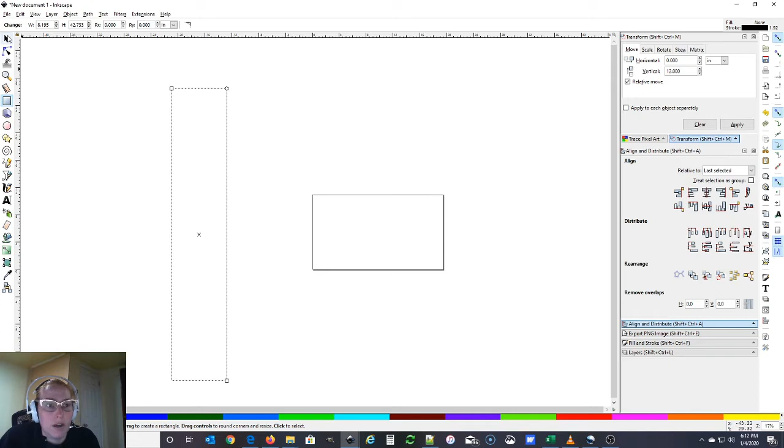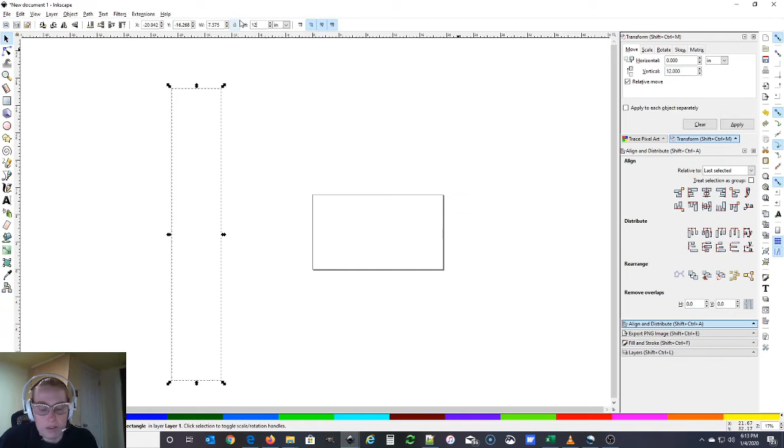So here is our board. We want it to be, let's see, what did I say my size was here? 7 3/8 inches wide, so 7 plus 3 divided by 8 inches. And our height is going to be 6.5, so 12 times 6.5 is 78. So there's our size for our board.

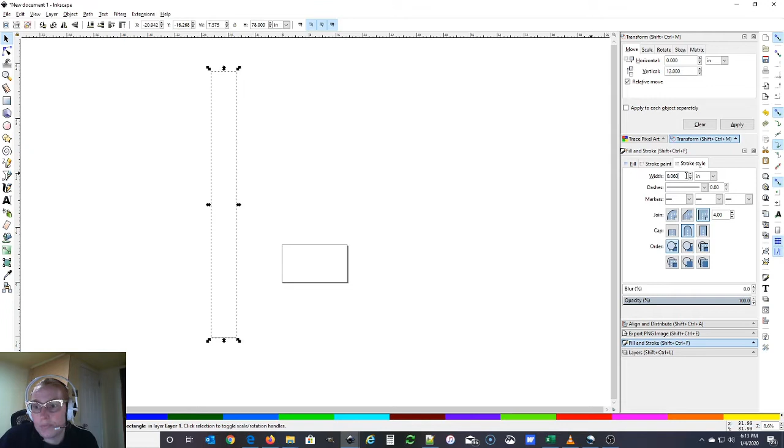Just because visually I want to be able to see it more, I want to increase my stroke size just to make this a little bit darker so I can see the outline. That's probably not here, let's try 0.1. There we go, so it's just a little bit darker.

So we're going to actually use a new tool called Transform. I have it opened up here. You can get to it, let's see, here, Object, and then Transform, and it will open it up over here on the right hand side for you.

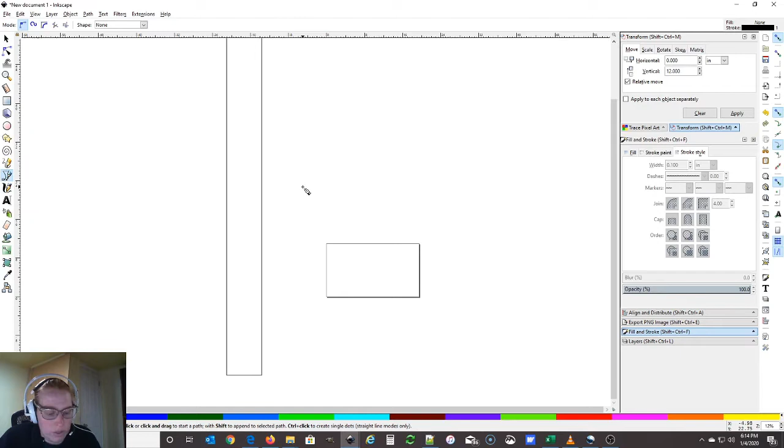And we're going to create our line using our Bezier tool. So here's our Bezier tool, and we're just going to hold Control down while you click and drag. Control makes it so that it's a straight line along the path for what you're doing. So we're just going to make our line, and then before we move our mouse again, you double click to end your Bezier tool. So here is our straight line.

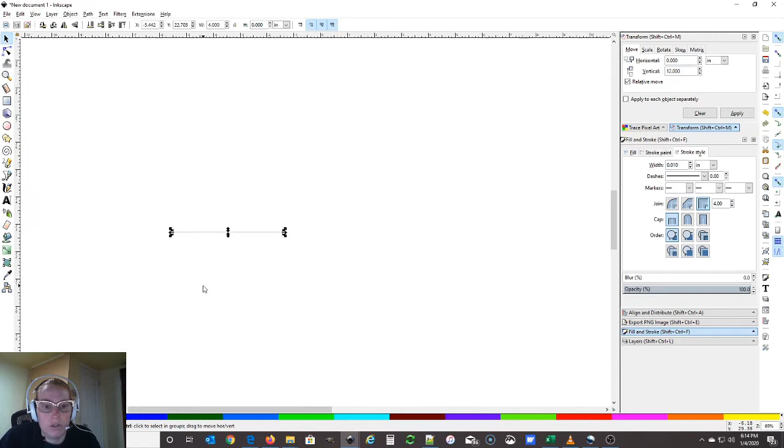And I'm going to say I actually want it to be 4 inches wide. So I did a little bit too much drawing, but that's okay. And, oops, I don't want it that much. I want it to just be a little bit thicker stroke so I can see it better. So we'll move it over here onto our board.

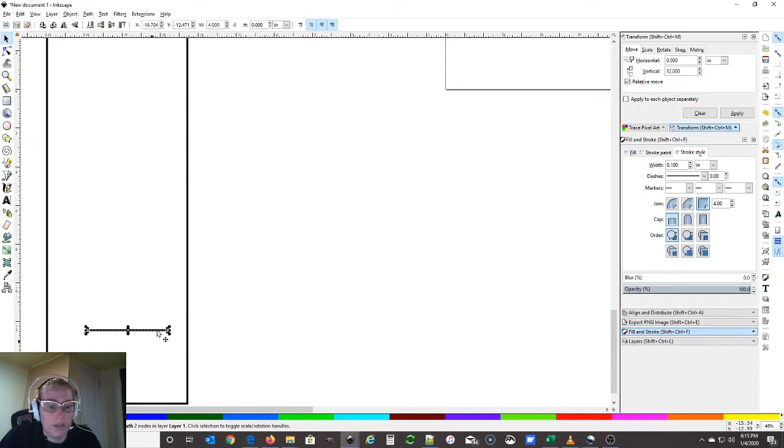So if we think about growth charts, the typical growth charts, like the one that I have on my wall too, the board doesn't start at the bottom of the floor. You need to give a little bit of space between where your floor is and where the board actually starts, because you don't know where your client is going to be installing it. They might have a molding going across, or there might be something going on on their floor. So you want to give a little bit of space. So you won't always start it at 0, you're gonna start it a little bit higher.

So this board is going to start at 6 inches as our height. And then when you go to install the board, you tell your client their instructions for installing, and they want to take into account where their floor is, where the child is going to be standing, and if there's carpet or anything with give, and then use a ruler or measuring tape to line up that 6 inches to be 6 inches off the floor. So then they mark the wall, and that's how they're going to attach the board to the wall so that it's accurate, so that when the person getting measured backs up to it, lines up to it, it's accurate going up the rest of the way.

So for our tool here, we have this line, and we'll position it here within our box later, but the first thing that we want to do is we want to create 12 marks, because we're going to split our board, each foot, into 12 inches. And so the transform tool will help with that quite easily.

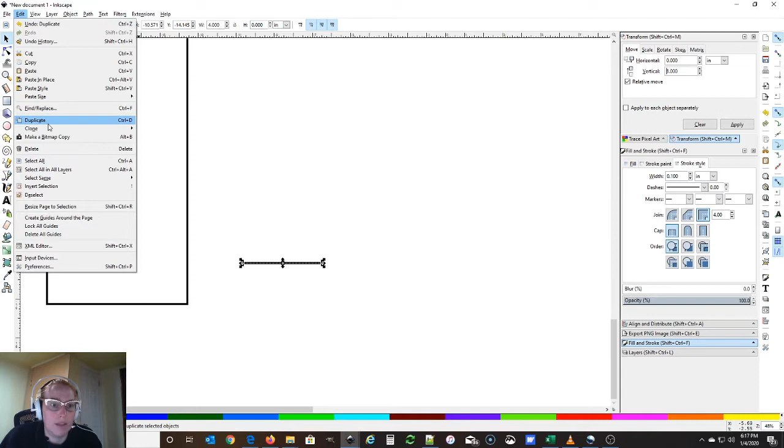So we have our tool. We're actually going to go every inch. We want 12 of them. So if you have it highlighted and you have it programmed over here, vertical 1 inch, then you can do Control D, or you can come over here and duplicate it. I like using Control D. Actually, it's under Edit, Duplicate, but Control D is what I'm used to because of keyboard strokes. And then when you duplicate, there's 2 of them there.

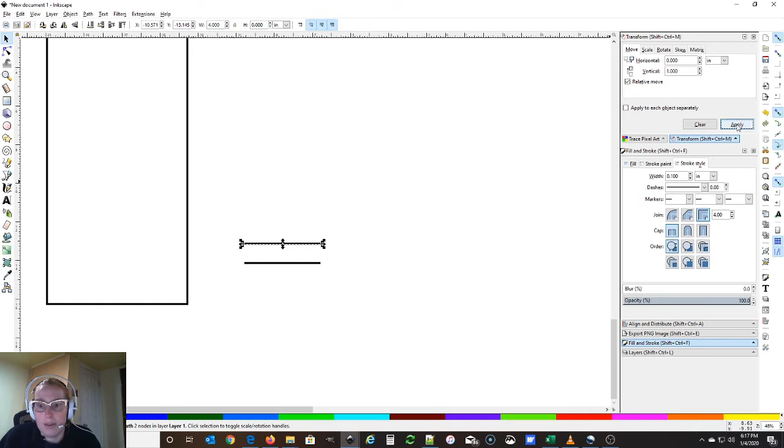So you could manually try to place it and line it up, but Inkscape has a tool to align this for you. So I deleted mine, so I'm going to Control D to duplicate, and then I have it set to 1 inch as a relative move, and then I apply. And it automatically moved it up 1 inch. Control D to duplicate, apply. Control D to duplicate, and so we're just making a duplicate and moving it up 1 inch at a time. So we're going to do 12 of these. 1, 2, 3, 4, 5, 6, 7, 8, 9, 10, 11, 12. So now we have 12 of these.

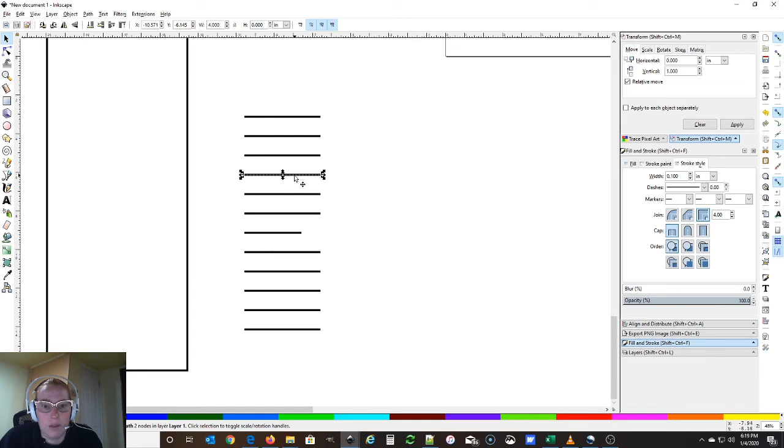And then we need to resize our lines to follow what a traditional ruler would be. So if we count up to 6, that'll be our middle mark for 6 inches. 1, 2, 3, 4, 5, 6. So let's see. Okay, yep, we're good there. So that's our middle mark, and I want my halfway point to be just a little bit shorter. And then we need to figure out what our next measurements are going to be. And so typically our next one is going to be at the quarters. So this one and this one, if I'm looking at it correctly.

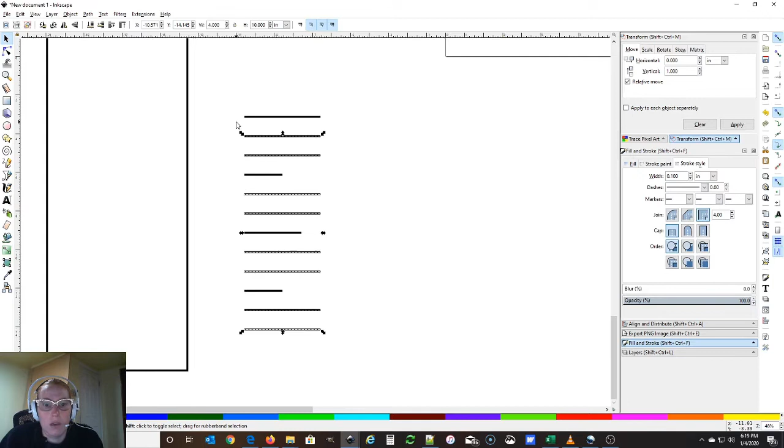So if I click on that one, and then I click on 1, 2, 3, that one, both of them are selected, and then I can say I want that one to be 2 inches wide, and it automatically resizes both of them. And then I want to grab our sets of 2, and I want that one to be 1 inch wide. So here we have our measurements for our ruler.

To start off with, we're going to put a text on here and say this is 1. And we'll play with font and placement of numbers and all of that later. So here we have 1, 2, 3, 4, 5, 6 inches, 7, 8, 9, 10, 11, and 12 inches, or 1 foot. And we don't have anything down here to represent the 0 because that's going to be taken into account over here. You could choose to also, if I duplicate this and bring it down, put on here 6 inches if I wanted to, or 1/2, or however you want to do it. For this design, I'm just going to go with the 1. So now we have our initial 1 foot mark.

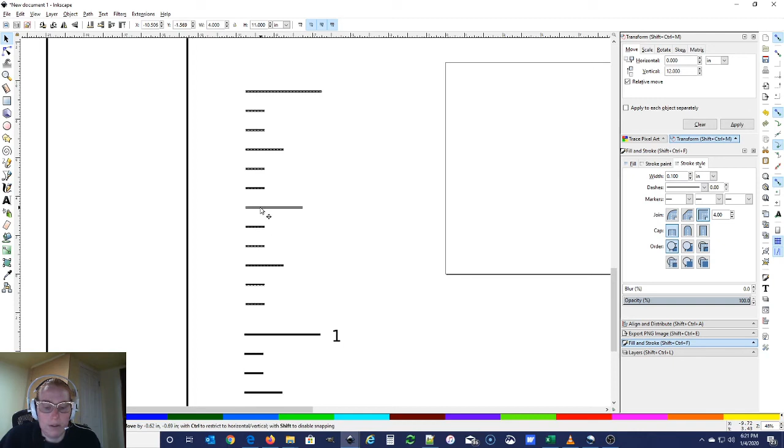So we're going to copy this, and we're going to duplicate this. So here is all of our settings. We have it all specified to what we want it to be. So we'll go over here and we're going to change our transform tool to 12 inches. So we're going to duplicate by foot. So you can do this manually again. You can copy all, you can duplicate, and then you can grab it and try to position it and try to figure out where it's going to be. But you could have the program do it for you.

So if you grab it, again, we're going to duplicate, and then we're going to have it move it relative 12 inches, apply. So now it did the mathematical relationship and just moved it to the right place. And this is 2.

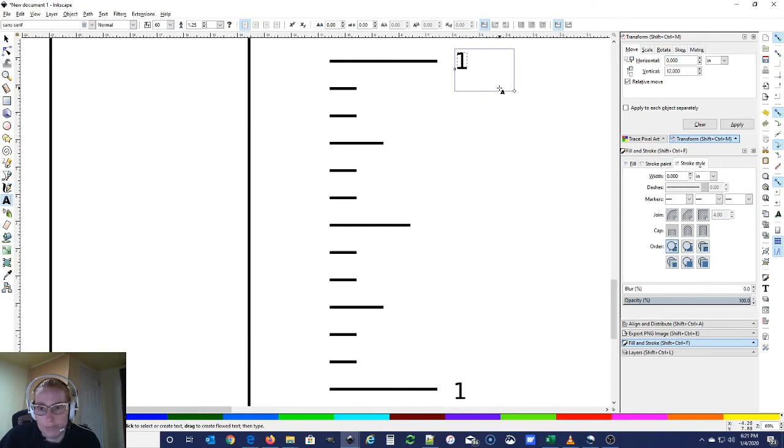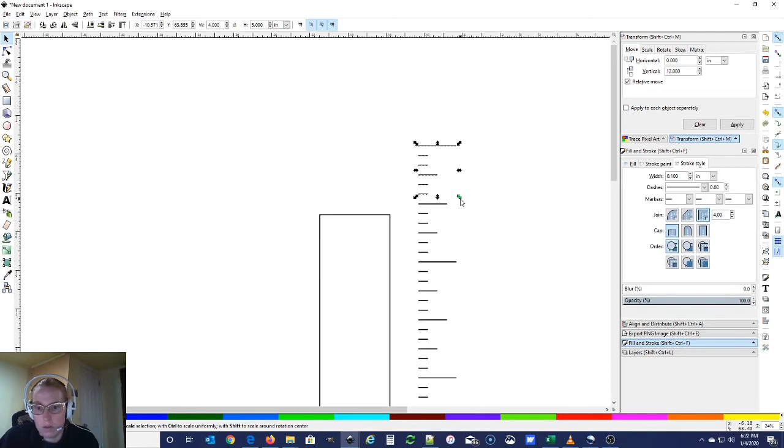So then we just kind of keep doing that. So we're going to do that again. Actually, I'll just grab this one. We're going to duplicate, apply, duplicate, apply, Control D for duplicate, apply, and where are we at here? 2, 3, 4, 5, duplicate, apply, and we're going to take it up to 7 feet here. But I'm going to chop off the top because I only need to take it up to 6.5.

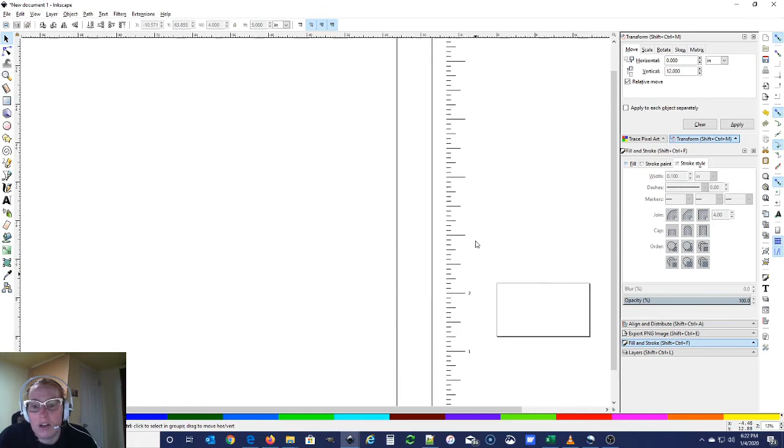So here is our ruler. One thing that I was asking the client for, and I don't know if you heard, the text just came in. I had asked her if she wants it to be centered. It's a friend of mine. So if we center this and then position it on, I'm going to turn off snapping. Sometimes they're helpful and sometimes they drive me nuts. I'm going to position it on the board, and this isn't actually exactly where it's going to go, but in fact I could have just done it with the whole thing and centered it.

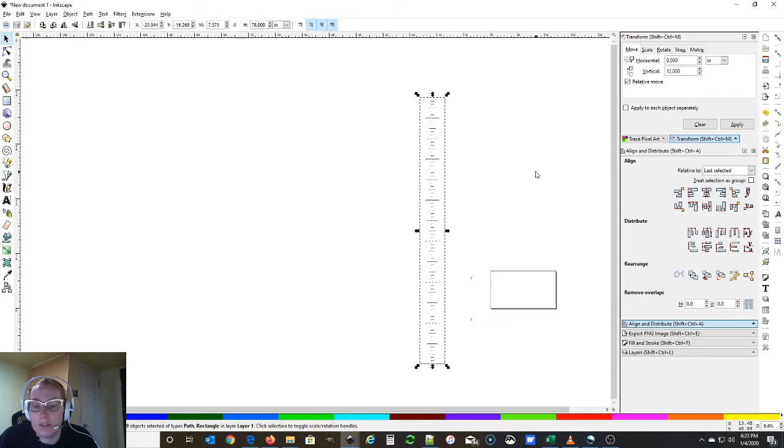So I like the idea, and I wish the one that we have were made that way, and maybe eventually I'll redo it. I didn't make it, I had ordered it way before I knew how to do all of this. That the measurements are all going down the middle, because then when your child is lining up, they're going to back up to the board, and then I use the ruler to hold on their head, and then we mark it across the board.

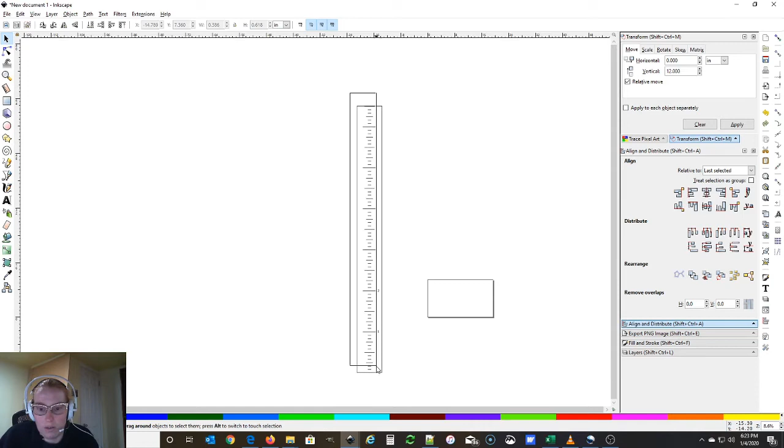And if it's on the left, which is what traditional measurement growth charts do, it looks like a ruler, right? If we line it to the left, it looks like a ruler, but then you have your mark here in the middle, and then we have to draw a line over to figure out where it is they're measuring. So to me, it's a little bit of a pain in the rear, and it makes the board a little bit more messy.

But people are used to having it look like this, and so she just replied and said she's at her son's hockey game, and she polled the crowd, and everybody's saying, do it to the left. So that's what we'll do. But when I upload this file later, I'll post both of them, centered and left, because why not? And you could recenter it yourself too.

So here is our growth chart. We're going to flip it back to being to the left. So the next part is, remember to make sure that you have your gap at the bottom. So we're going to chop off the bottom measurements here, and we actually don't even need that mark. So our very bottom of the board doesn't actually matter where it's going to be. This is just a visual, really.

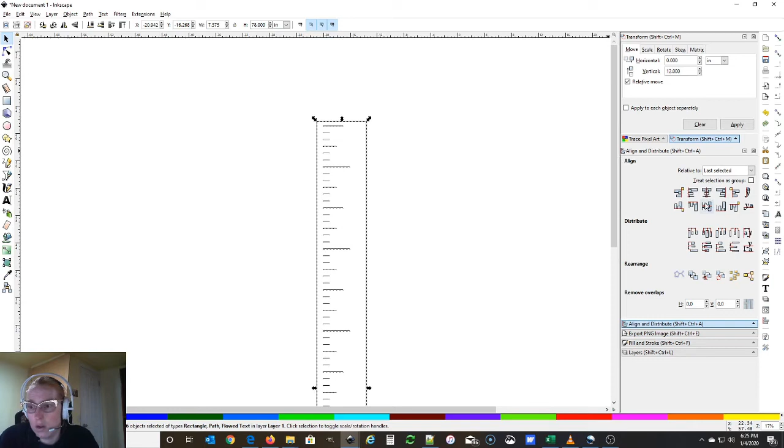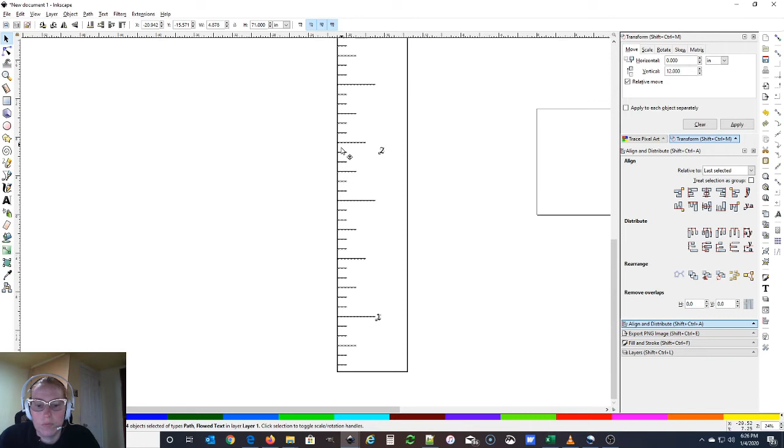We're going to center it over to line up. Oh, except I grabbed my numbers too. So we're going to pull that out. So just barely above. Because I don't know about you all, but you don't usually have a child that's 6 inches tall standing up to the board. Okay, so my numbers are in place.

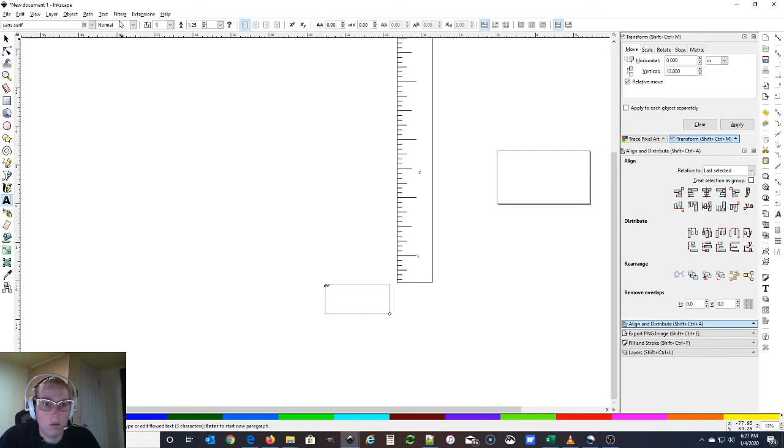This is a visual. The floor, there's gonna be an open space here. That didn't work. Oops, wrong tool. Holding control down. There's gonna be an open space here to the floor. So if we put just a little info here that says gap with no board for wall accents to fit. If that makes sense.

This growth chart relative to the 1 foot mark using a ruler or measuring tape.

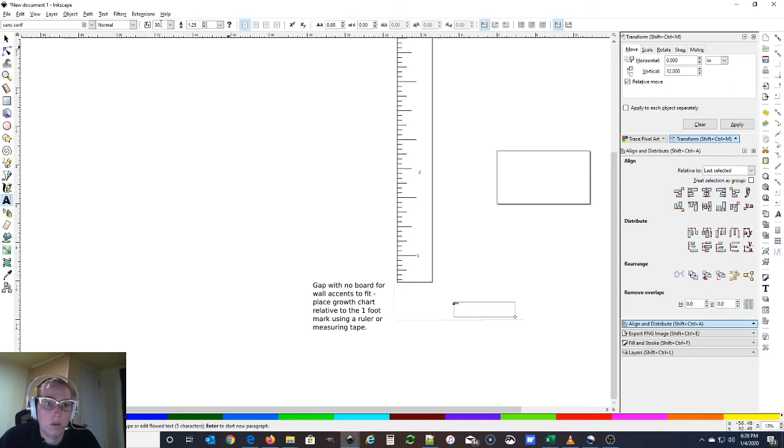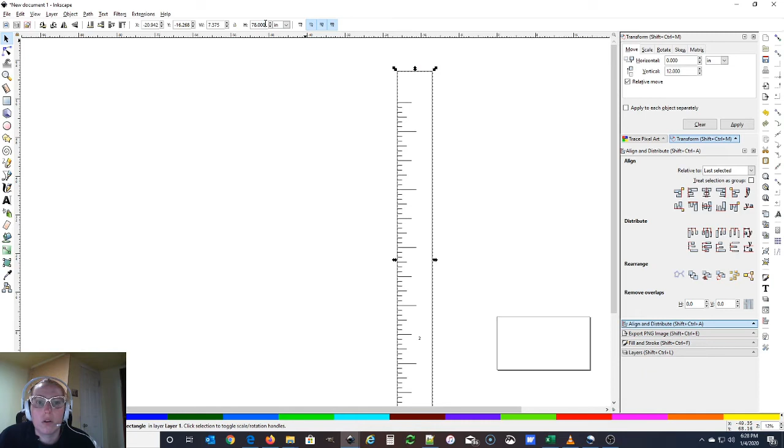And it looks like I actually shouldn't have chopped off. Oh, I forgot. We're going to subtract 6 inches here. We're going to cut the board down to 72. Okay, so let's put our numbers on. So we've got 1, we've got 2 that needs to get moved. And we probably want it a little bit bigger. Zoom in so I can actually grab things. And we need to actually choose our font too. And I was thinking about fonts earlier.

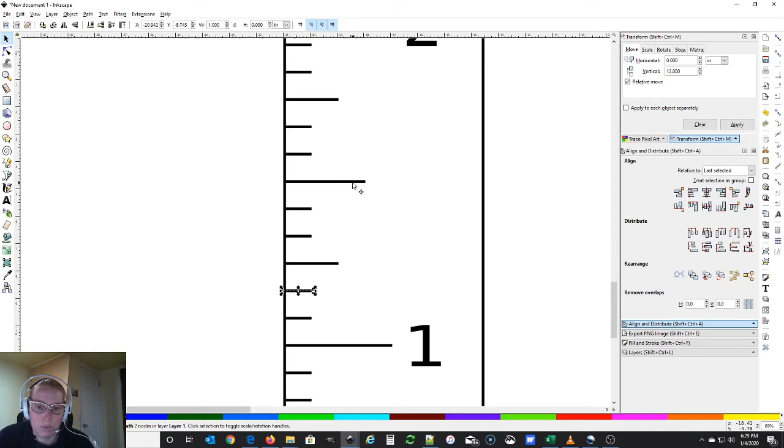So the tool that we're going to be using to do all of these lines and our number engraves is a router. And so it's got a circle bit. So we need to make sure that there aren't a lot of sharp corners. And so all of these are actually going to end up being a little bit rounded. So we could change what our line looks like if we really wanted to, but it's not necessary. The Shaper will read it and recognize. But for visual aspects, I want to choose a font that fits this.

So to do that, I have WordMark installed on my computer. I have way too many fonts, as I've mentioned before. So if I open up WordMark, I can put in my number sequence and hit enter, and I can find some fonts that I think would look really nice or be relative to it. One of the fonts that I have installed on the computer is some Harry Potter versions, and so I thought, well, maybe that could look pretty cool.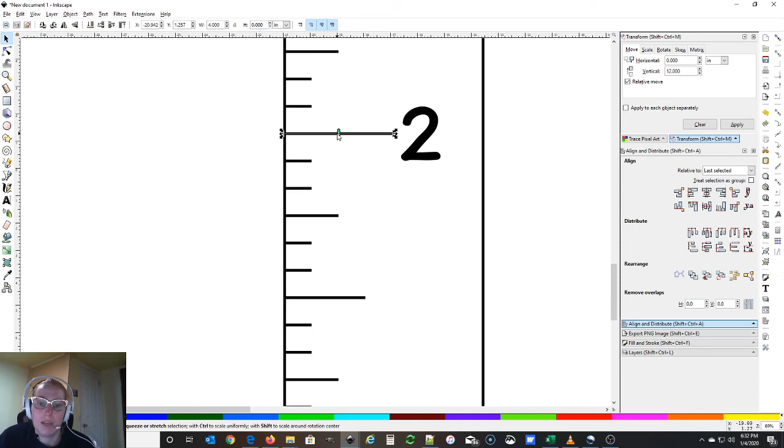Oops. So one thing about Inkscape is whatever the last one you click on, that's the one that's going to stay in place, and that's what everything moves to. So when you are trying to align to a certain thing, you have to go in the right order. The first several are what I want to move, and the last thing that I click on is what it's relative to. So I wanted the 2 to be centered relative to the line.

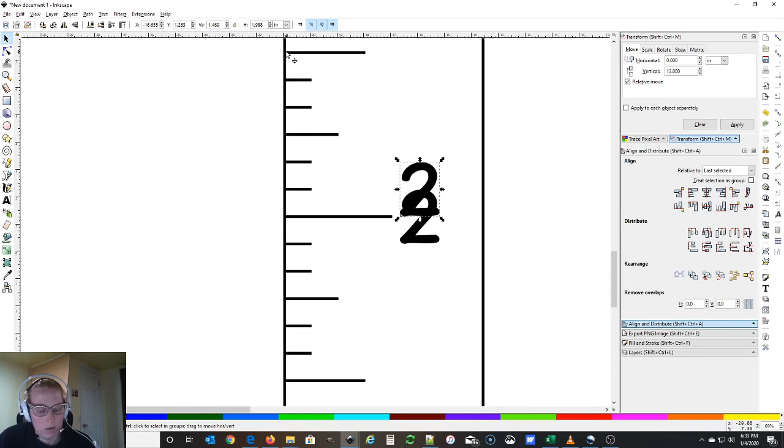And I want my 2 and my 1 to be centered together, but I'm going to move both of them out just a bit. So if you hold down Control when you're doing things, we're actually going to duplicate 2, and then we're going to move our 2 up 1 inch. Whoops, that's the height, sorry. Our Y, we're going to move it up by 12, there we go. And then we'll just change this to say 3.

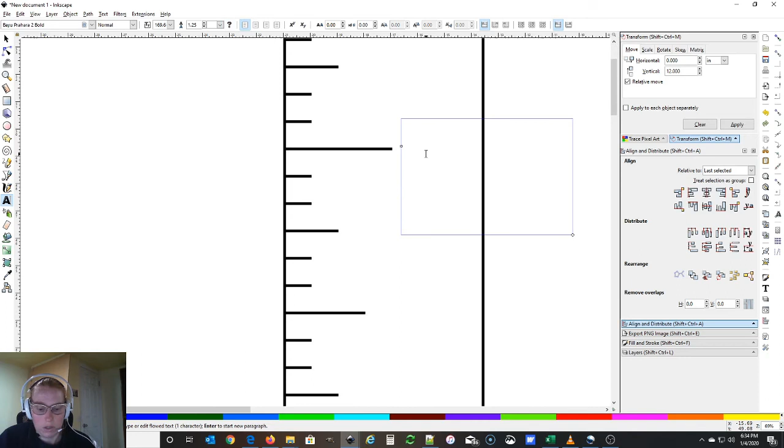And we'll repeat. So we have this one, we're going to duplicate, we're going to go over, we're going to add 12, and it's just going to keep rolling up. So then we're going to take this and change it to 4. We're going to duplicate. When we duplicate it, we're going to add 12 to move it up the 12 inches or 1 foot. Again, we're going to duplicate. We're going to move that up 12. Forgot to change this to 5. Change that to 6. And there we have our growth ruler.

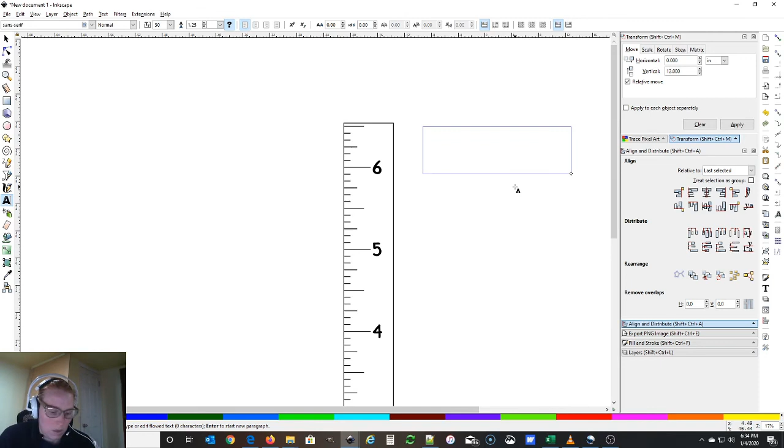So a couple of other things that we're doing is we're going to put a name on it. So we're going to do Aiden. And we'll resize all this later.

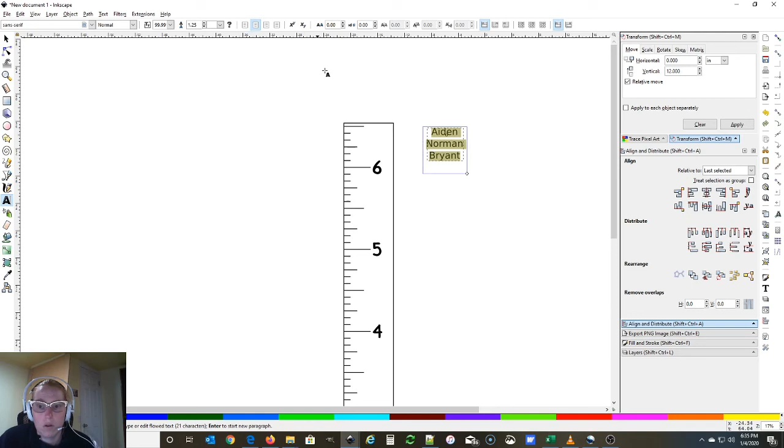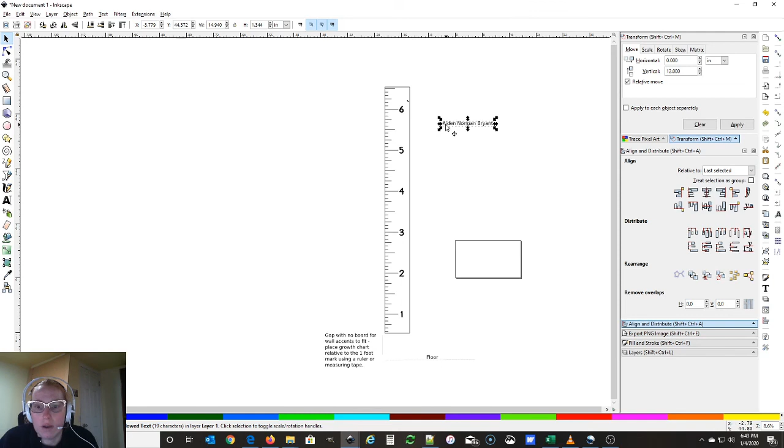So I should actually ask her if she wants the name to be horizontal or vertical. And she likes the idea of having the name run up and down the board. So actually, let's change our font first before we do that part. So let's make it the Bayou.

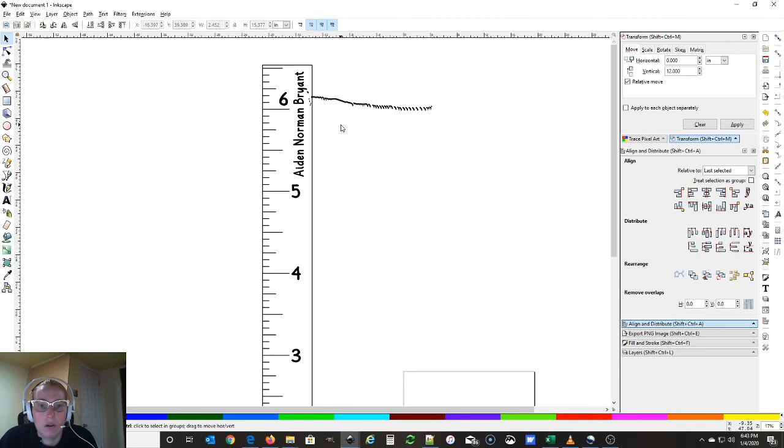And on this, I really don't like how close the letters are together, so I'm going to space them out just a little bit more. By using this spacer tool, it can stretch it out. Yeah, that's good. And then we'll flip it sideways. And we're going to put it along the side, but this 6 here is kind of in the way, so we're going to go ahead and move that up. There we go. We have our file.

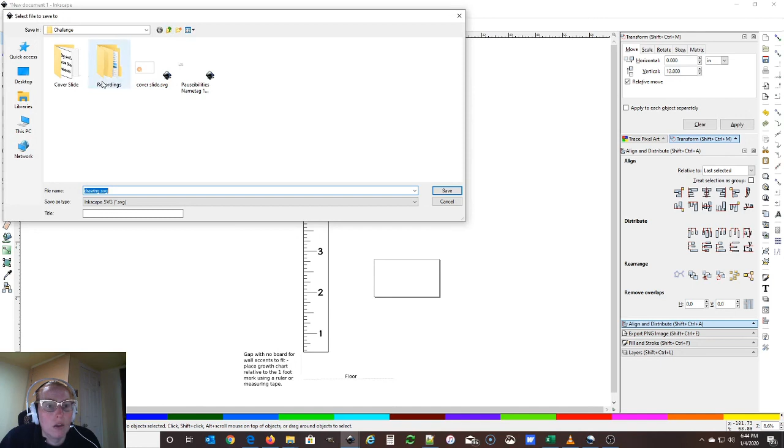So the next steps for this would be to obviously save it. So we're going to get it saved, and then we'll get it ready to load into the Shaper file. We're going to save this under commissions.

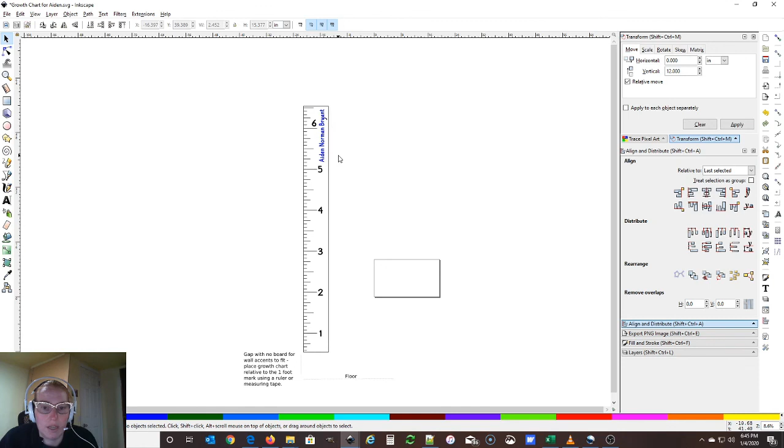One thing I forgot to mention, I'm actually going to flip this over to be in a blue color. This is going to be engraved in the Glowforge machine. So when we get to that point, we'll split up the file and get it ready for loading in and positioning in the Glowforge. At that point in time, all of the numbers and lines and stuff will already be on the board, and we'll just be doing an engrave of the name.